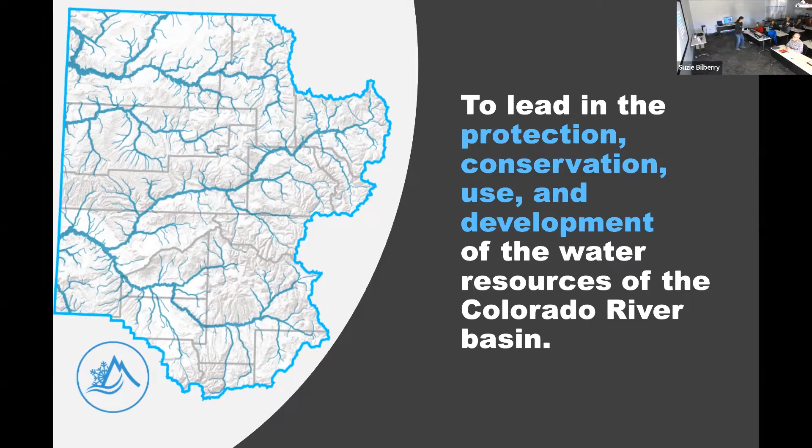And so... maybe I should take this with me. Just wanted to show this map.

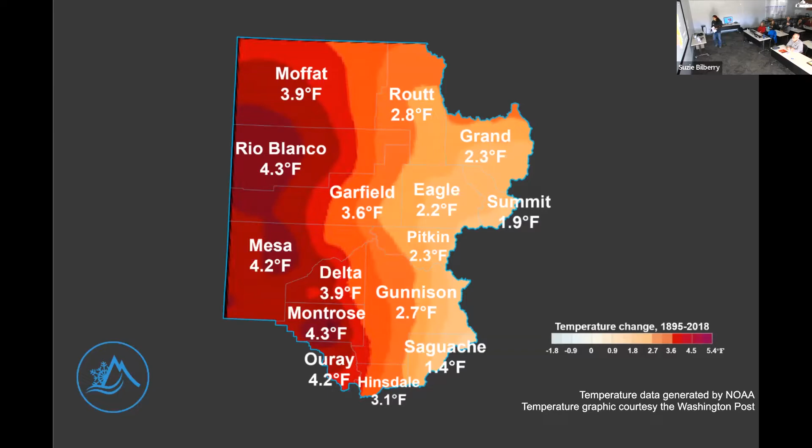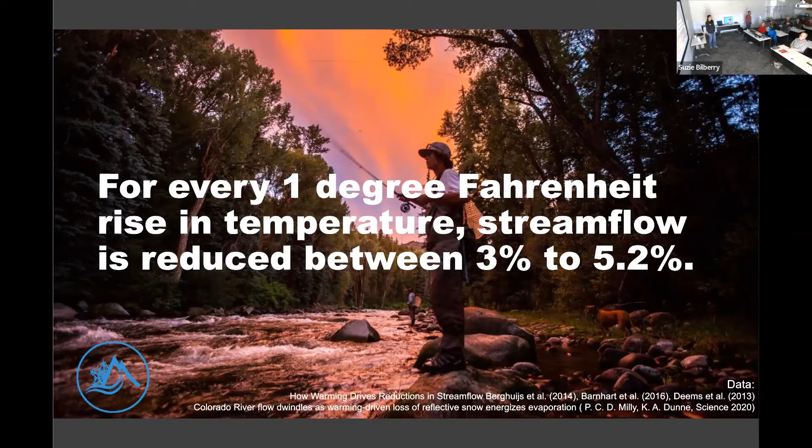I would like to introduce and thank Susie Bilberry with the Delta Conservation District. She has really been amazing to work with in organizing this workshop. So thank you, Susie.

We do have several presentations today, as you can see, and we really hope that you enjoy it. To get us started, I would like to invite Paul Maudlin. He will present or introduce our first speaker.

So I'm Paul Maudlin, and I'm from the Delta Conservation District, and there's a few other supervisors here, I think. Dave Whittlesby, Dave, raise your hand, and Paul K. Meyer, everybody knows him. And Stephen, you'll have to supply your last name too. Morris. Morris, that's right. Okay. Anybody else? Okay, all right.

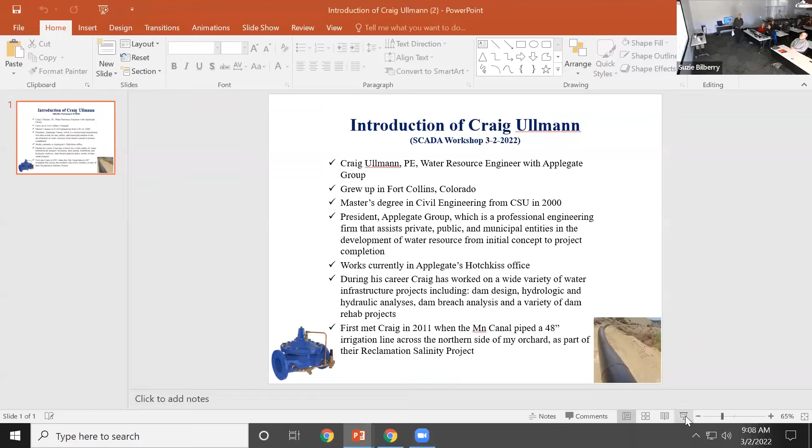So here's a slide. I'm pleased to introduce Craig Ullmann today. Sorry, one second, let me just share the screen here so people who are virtual can also see it. There you go. So do they know my name on the other end?

No, no, you can repeat it, please. So Susie, I think you're supposed to be talking right now. Oh, yeah.

So Craig is a professional engineer. He's a so-called water resource engineer with the Applegate Group. He grew up in Fort Collins, Colorado, went to high school, went to college. He's got a master's degree in civil engineering from CSU in 2000. He's currently president of the Applegate Group, with several locations - Hotchkiss, Glenwood Springs, and on the Front Range in Denver somewhere. Applegate is a professional engineering firm that assists private, public, municipal entities in development of water resources from initial concept to project completion.

Craig actually works and lives in Hotchkiss, so he's close by. During his career, Craig has worked on a wide variety of water infrastructure projects, including dam design, hydrologic and hydraulic analyses, dam breach analysis, and a variety of dam rehab projects.

I first met Craig in like 2010 or 2011, associated with the Minnesota Canal when they were piping their open ditch as part of their salinity projects. When they were doing the piping across the northern side of my orchard, I met Craig a couple of times, and I think I met the other local engineer that was kind of on site.

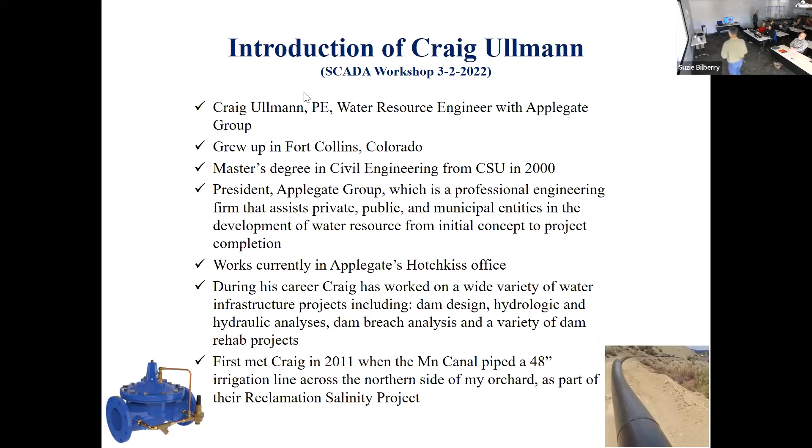So a couple disclaimers too, as I'm an engineer, it means I'm probably not the best about talking to groups of people, but I'll do what I can. Also, as Paul mentioned, Applegate Group, we're an engineering design firm.

We are not a SCADA implementation firm. We've helped some of our clients through a lot of our ditch and reservoir projects identify areas where SCADA could help them improve their systems, and then usually we'll hand them off to someone else who can help them with the nuts and bolts of exactly which equipment to put in, who's going to maintain it, and all those things. So I'm supposed to just give a brief overview. Some of you in the room may already know a lot of the stuff I'm talking about, but I'll give a brief overview of what it is, what it can do for systems, and what it's done for some of the systems around here. There's going to be some guys talking later about specifics on projects they've done, but I guess here goes.

So what SCADA is - it's an acronym, and there's about 20 different acronyms if you really dig into SCADA, but SCADA itself stands for Supervisory Control and Data Acquisition. There are several components to a true SCADA system. Some of the things I'm going to talk about probably wouldn't classify as a true SCADA system, but I'll go over that later. Usually it's a system where you're taking technology and using it to monitor systems, acquire data from systems, and control them, usually from a remote location.

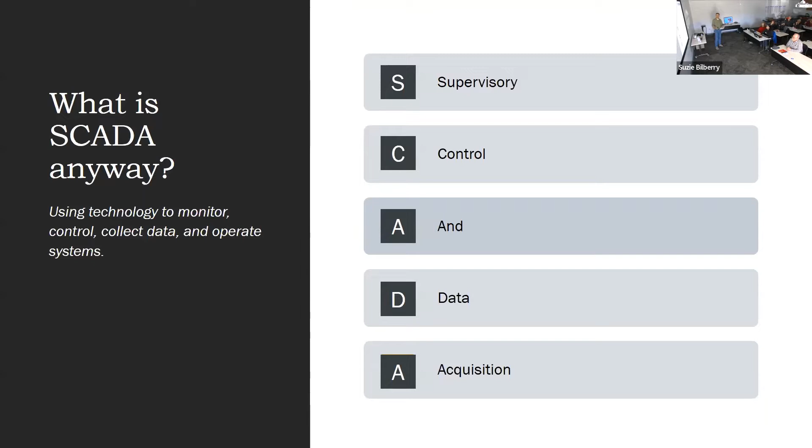On your canal side, it can do the same thing. You're diverting off of a creek - a lot of the creeks around here, as you guys know, have a big diurnal swing. They're high one time during the day and they crash during another time. You get a cold snap and the creek crashes again, and you're constantly trying to go up to a head gate to maintain the proper flow in your ditch. SCADA can help address that kind of thing with the canal.

Other canals, like you get down into the Grand Junction area, some of the big canals down there, they don't necessarily need to run at the same flow rate all the time based on demand, but they need a certain level in the canal to service all their lateral turnouts. So it becomes challenging for them to maintain their canal levels at variable flow rates. SCADA has been implemented in some instances down there with check structures to maintain canal levels at a static level despite changes in the flow rate in the canal, and that provides a good level of service to all of their turnouts in the system.

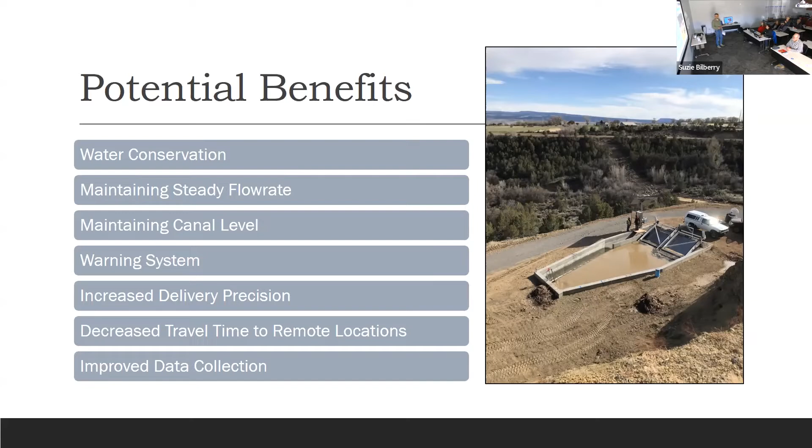A little history of SCADA. We obviously a long time ago identified the need - we used to have just a lot of people to run these more complex systems. And as population has increased, systems have expanded, the complexity has increased.

Electric power generation and transmission - you're talking about a nationwide grid now. To monitor that, there's a benefit to having a central control station that can see what's going on at one time.

Manufacturing doesn't apply to you guys, but it's another place that SCADA is commonly used. As a side note, my wife runs an herbal tea company up in Hotchkiss on our property. We have a little machine that packages the tea, and there's all sorts of little sensors and a computer in there that's watching the sensors, and it tells us if there's something wrong, or if we're out of some materials.

So there's all these different little things happening that are being monitored. It's almost like a little SCADA system in that one machine. And that's pretty common with manufacturing. Go to bigger automobile manufacturing plants, and they have SCADA all over the place monitoring the systems as the cars go through. But transit systems is another example. CDOT essentially has a SCADA system with a lot of their information on road conditions and cameras.

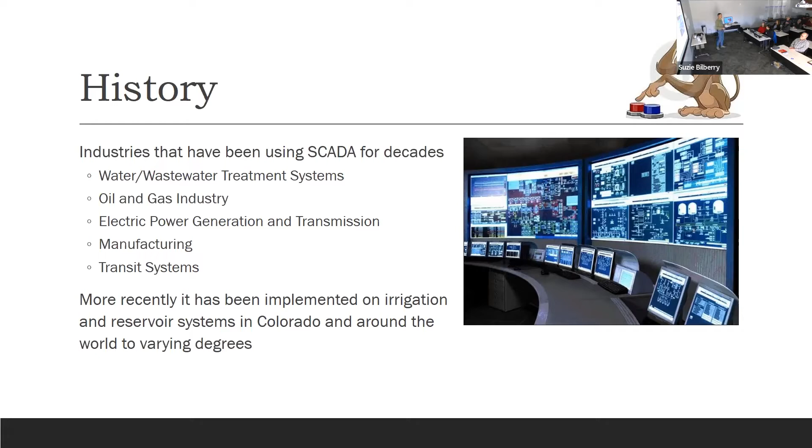More recently, it has started to trickle down to irrigation systems. In the past, irrigation systems were pretty much open ditches. Guys went out, changed the gates, and that's how it was. But more and more people are recognizing how some of this technology could be used on irrigation systems and reservoir systems to improve operations.

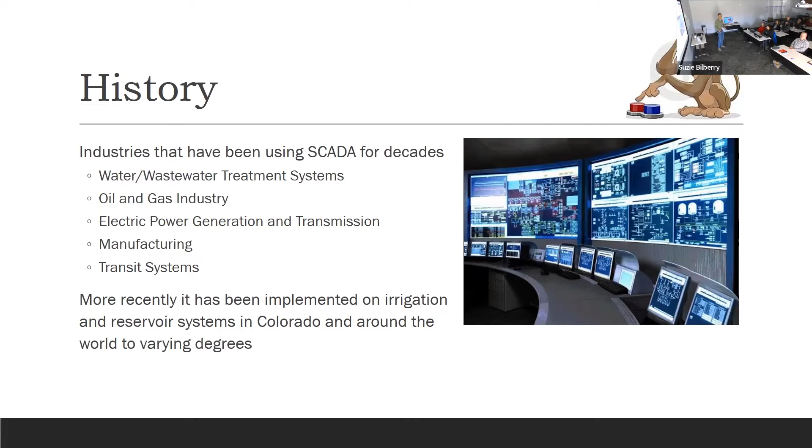I kind of broke this out into different levels of what I would call SCADA, but some of these probably wouldn't classify as a true SCADA system. I'm just trying to think it through and present it in a logical manner. The lowest step is just local monitoring.

This is where maybe you install a recording device on your head gate flume. That would probably be the most common one. Typically, head gate flumes are read by the water commissioner and recorded in the state system, however often they visit the site, and that's the data. Some sites we have just implemented a data logger and a level recorder that monitors it, checks it every 15 minutes, and records it to a data card. That's a very basic level, but it does start to get you more data on your system and what's happening.

Local monitoring and control is the next step, where you have a single site and you're going to install some monitoring and control devices. I'm going to go through all these in a little more detail.

Another step up would be remote monitoring. Now you're able to access the site - you've basically cast the signal up to some form of communication, and you're able to access it via cell phone or computer somewhere. But the next step after that is now you're not only monitoring it remotely, but you're controlling it. So now you can send signals back to the device and make adjustments to your system.

And then a final step, which really isn't too common around here with the ditch and reservoir companies, is automated monitoring and control. I'll talk about that a little bit.

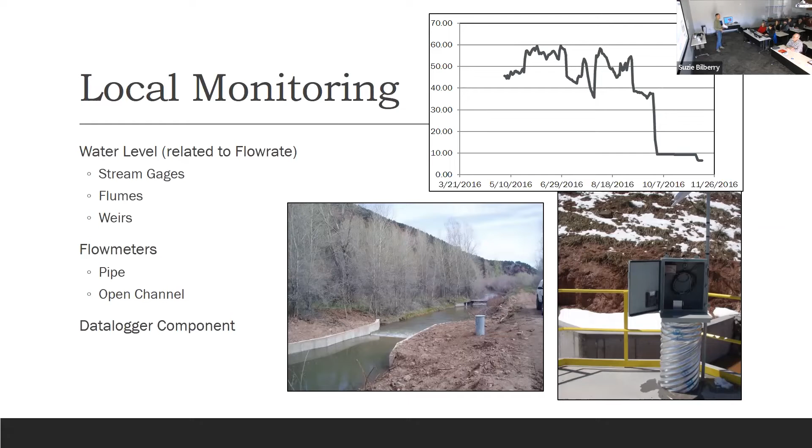The next step, as I mentioned, is when you start adding, in addition to local monitoring, some sort of control at the site. This is still all contained at the site, no remote communication with anything. This is an example of a structure we did, the Needle Rock ditch.

Up on the Smith Fork of the Gunnison, this was partially in conjunction with the ditch company through some funding with the RCPP project. This is the stream, here's their head gate, and we've got a control box here. The signal from our measuring flume below this structure comes into here. There's basically a computer watching that, and you set the flow rate. We want 30 CFS, that's what we're in priority for.

The gate will then open and close to maintain the flow rate, because the Smith Fork, especially in this spot, is extremely volatile. It varies. It can double in flow overnight very quickly. It can also crash overnight if it gets cold, because there's no reservoir storage or diversions above them. So they're pretty much a natural run stream right there.

The kind of downside to this is staff does have to visit the site to make changes. They can't change this site remotely. Someone has to physically go up there and type in the new flow rate.

So a typical site would consist of a sensor or multiple sensors. This site, we did add some level sensors in there to also be tracking the river level and the level below this, which is a stilling pool here. We track the level of that just to see if there's anything going on, because there's a screen in between the flume and this point. So if the level hasn't changed, but the flume suddenly sees a decrease in flow, we know the screen is plugging, and so that gets tracked.

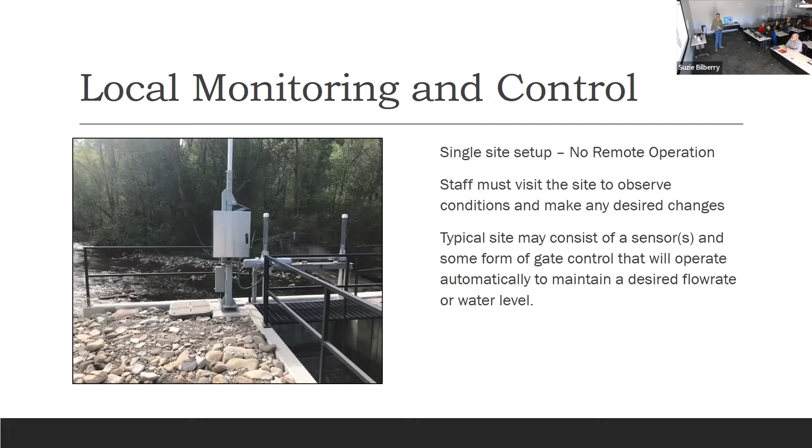Ultimately, this is supposed to get put into a remote system so that it could send an alarm, but they're not there yet.

So some other common uses, obviously flow rates. You guys have used the stream gauge network throughout the state, you can go in and check stream flows all over the state, and there's some canals also within that system. Canals, diversions, reservoir inlets, outlet flumes.

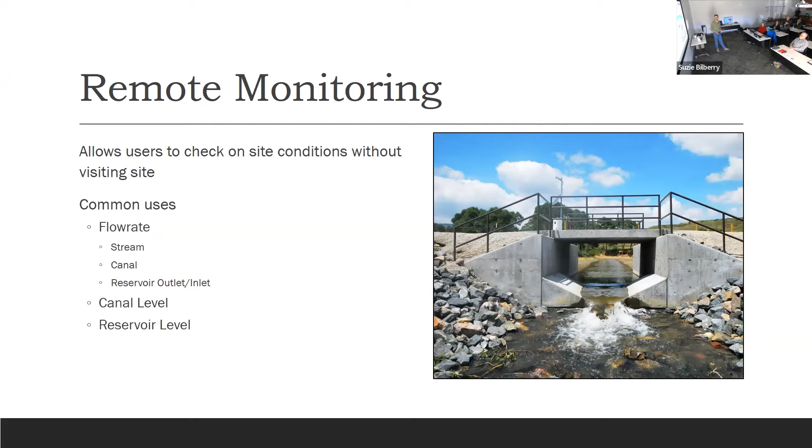Sometimes you want to track your canal levels, you want to know the elevation of the canal, maybe more critical to you at a certain point. Reservoir levels, like how much storage do you have left, tracking that. So those are all benefits of just doing basic monitoring.

Next step is you're doing that remote monitoring, but you want to be able to make changes to the system based on what you see. So now you're adding usually some form of a gate actuator to either an existing gate, or installing new gates with actuators built in.

Sometimes these are single sites, sometimes multiple sites. Common uses would be stream diversion gates, reservoir outlets, trash screens, or major bifurcations, like some of the canals in Junction have a split where it splits 50-50 or 60-40. Monitoring some of these key points within the system and controlling them can really save a lot of time if you're out there frequently, multiple times a day, trying to make adjustments.

The picture there was a structure we did. I tried to find a better one, but this is the best one I could find that shows the box. This was a device, which I'll mention later, made by a company called Rubicon, and it's a flow meter and a gate all in one.

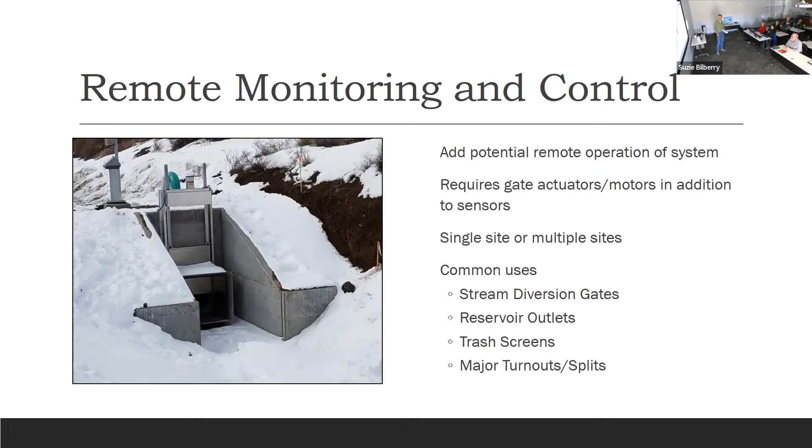That was put on their head gate diversion to monitor their stream diversions. Then you go to the highest level of what SCADA might look like, where you have an automated control and monitoring system.

This really isn't used, as far as my knowledge, within much of the US. They're kind of going towards it, probably out in California, maybe the Pacific Northwest, where there are some very large irrigation systems that are really trying to hone in on their efficiencies.

This picture is one I borrowed from Rubicon Systems. They're a gate manufacturer in Australia that was born out of 2007 through 2010 or so. They had a very extreme drought. Stream flows were half what they were. Kind of sounds familiar, right? Where we're unfortunately at right now.

But the government, for these very large systems, came in, and Rubicon was born out of this. They put 20,000 of these gates in throughout the system. They gated everything, went from wooden checkboards to all these gates.

The gates talk to each other. They know if the farmer can go online, he orders 5 CFS of water, wants it there at 6 a.m. All the gates communicate up clear to the river diversion. The system has learned through past experience how long it takes that water to get there, and what gates need to open and close at what times.

You can imagine the extensive amount of infrastructure required and the investment the Australians put into that system. But it increased their efficiency pretty substantially, and that's their breadbasket area.

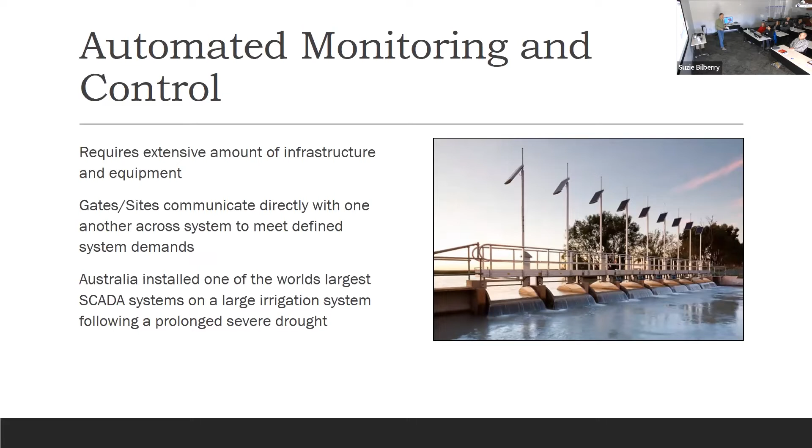So some of the components, just touching this at a high level: usually you have some form of sensors, and I'll go into different sensors later. But some other terminology you've probably heard is RTU, remote telemetry unit, or remote terminal unit.

These are basically, if you have a site with multiple sensors that you're going to cast to the satellite or some form of communication, you'll have an RTU. The sensors will feed the data into the RTU, which will then transmit the data to another location.

A lot of times, instead of an RTU, because RTUs and PLCs, programmable logic controllers, kind of have overlapping tasks, but PLCs are a little more flexible. They're used a lot in local control, like that Needle Rock head gate I showed you. There's a PLC there because it needs to be custom programmed to make decisions on how to open and close the gate, so that requires a PLC on site.

If you're going to be making the decisions elsewhere, then you maybe don't need a PLC right at the site itself. HMI is another common acronym - it's a human machine interface.

Basically it's a screen. Anymore they're going to mostly be touch screens because they're very easy to access and navigate. But it can be anything from just a little touch screen at the site, like we have at that Needle Rock, to maybe if you're casting everything back to a home base.

You have a computer screen that you can access everything through. One of the earlier photos I showed was a room, basically for, let's say, a large municipality like the city of Los Angeles and their water system. They'll have a whole room full of screens just monitoring their whole system.

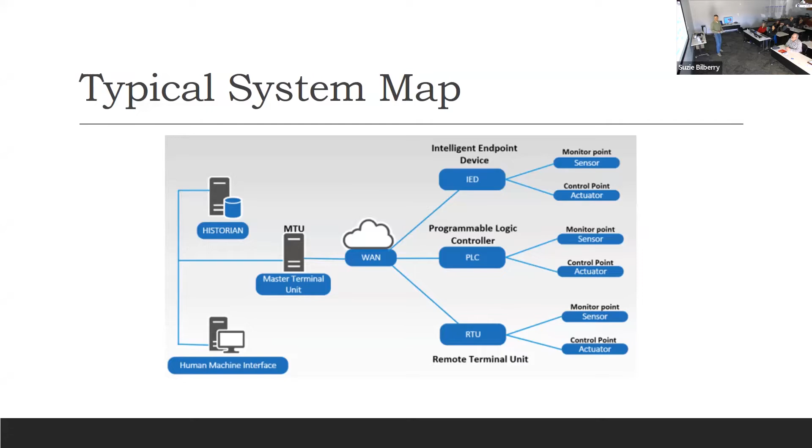Getting into sensors just a little bit, the most common one is some sort of water level sensor, because if we know water level we can relate that usually with the flume to flow rate. Also sometimes you're just interested in the water level because it may relate to whether you are spilling or not.

So there's a lot of different kinds out there. There's floats - this is a Sutron device. These are very commonly used around the state because of their simplicity. Basically down below there'll be a float on one end of a cable and a counterweight on the other, and that rotates this shaft, which has an encoder built in that knows how the water level is changing. Those usually have a data logger built into them, so you can plug a card in at the end of your season and it automatically downloads the year's worth of data.

There's pressure transducers, which I'm labeling as contact type - these have something actually touching the water. This is a pressure transducer, and I see someone brought some up here too, so these are actually immersed in the water. Another one frequently used on reservoirs is a bubbler system, which is basically spitting out bubbles and measuring the pressure required to discharge a bubble from the end of a tube. By knowing how much pressure it took to discharge the bubble, it knows basically what the pressure is sitting on the end of the tube.

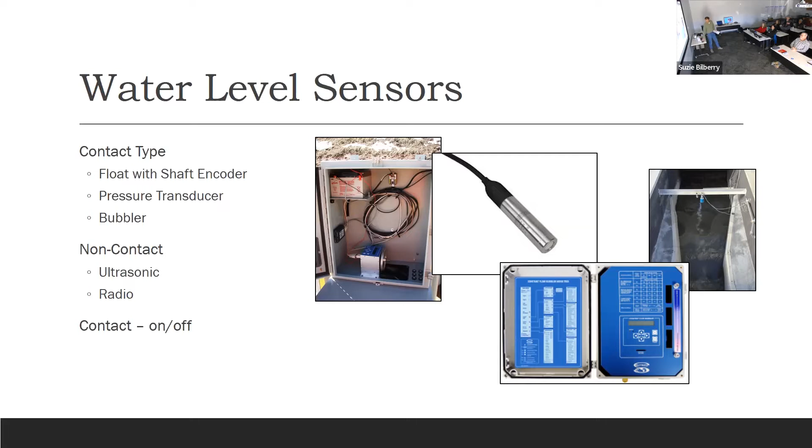And then a third type, I guess I doubled up contact, but there are some older ones that are just contact sensors - they know if they're wet or not, that's it. They have been used before as a high-low setup. If you're trying to maintain a canal level within a certain range, you could set one sensor low, one sensor high, and it knows you're above the set point or below the set point, but it doesn't tell you the actual level. So those are probably used less and less as these other options become more available.

Getting into flow meters, velocity meters.

There's a lot of different flow meters out there in the last 10 years. There's mechanical meters, which were more common a long time ago, just the old propeller style meters. These were used a lot out in the Pacific Northwest - their whole systems were using propeller meters to meter all the farmer turnouts, but they've slowly been converting to other options.

This is an electromagnetic meter made by Seametrics. This is an ultrasonic meter made by Metafim. They've been converting to those because of the maintenance on the propeller meters - the bearings wear out eventually, usually replacing bearings depending on how dirty your water is, possibly every 2 to 3 years. That gets to be a problem if you have 1,000 of those across your system. So a lot of people are going to more of these. These also have data loggers that you can get as an option, and some even have them built in.

Other options - this is an acoustic Doppler meter that can be mounted either inside a pipe, in a rectangular channel, or even in an open channel if it's fairly prismatic, but it's basically tracking the velocity. It develops an average velocity for your cross section, and it needs an area relation curve, because this little sensor is measuring the water depth. So it says, I'm this deep, which means based on my curve I have this much flow area multiplied by my average velocity, and it spits out a discharge.

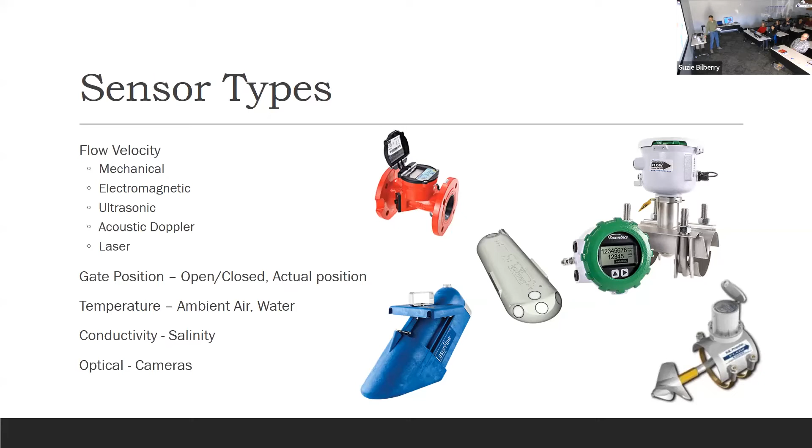Integrated gates - there's several companies out there now selling these, and this is not a concise list. I actually realized I forgot one that I'll mention here, but Watch Technologies, if you go to any conferences, they usually tend to be there. They basically make their own custom slide gates and they'll attach actuators to them. They also sell smart gates.

They'll add level sensors so that you can basically program, and the gate can be kind of a standalone unit that you can then program if you want to maintain upstream level, downstream level, or a flow rate through the gate. They can provide that type of device. They can also provide actuators and equipment to automate existing gates. If you have a slide gate on your system and you want to basically have the actuator on there, Watch Technologies is a group that's worked with folks on that.

Rubicon Water is another one that we've worked with on various projects. This was done quite a few years ago on the Front Range, but it was a pretty unique project. Rubicon sells various gates now - at this point they have some overflow gates, some sluice gates, but they're the guys out of Australia that came out of their drought. Their gates are touted as being very accurate for flow measuring and controlling.

So it's one - you put the gate in and the gate's measuring the flow. You don't need a supplemental flume. It monitors upstream level, downstream level, and the gate position, and by doing that it's able to calculate the flow. But you can use it to control a variety of things and you can program it.

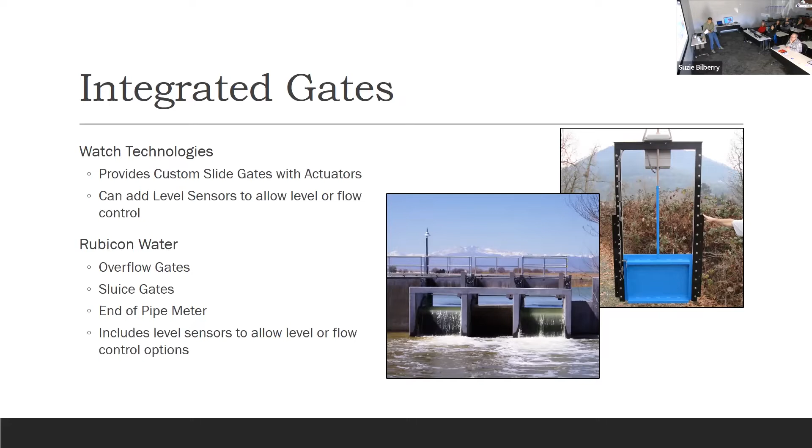Additional considerations that you definitely want - if you're considering a SCADA system and you start talking to either an engineer or a SCADA installer, there's a lot more to it. You've got to really look at the appropriate level of SCADA. It can be easy to get carried away and start looking and say, oh, we'll automate all these sites.

But usually for the canal systems around here, the Australian model just, I don't think is really all that applicable, and I don't see it happening on a lot of the systems around here. A lot of our ditch systems are very small. Water rights get extremely complicated on the smaller ditches because you're going in and out of priority all the time.

To try to automate such small systems would be very expensive and challenging without a lot of benefit. But that doesn't mean there's not an appropriate level that would provide a significant amount of benefit for those systems. Power availability—usually these things are just done with solar.

Trash screens, however, are one thing that if you're going to incorporate a trash screen, you really need to consider. The one we did with Fire Mountain is one of the few solar powered trash screens I know of. Most of the time, if you're putting trash screens and automated gates in, you're probably going to be bringing power in, unless you use something similar to what we did on Fire Mountain.

Communications—what are your options at the site? Cellular, radio, satellite. Satellite's becoming more and more common, I think, but cellular in Western Colorado can be tough. There are a lot of sites and canyons where you just can't get a cell signal. So then you're looking at almost a combination where maybe you bounce your signal out to a place where you do have cell service via line-of-sight radios.

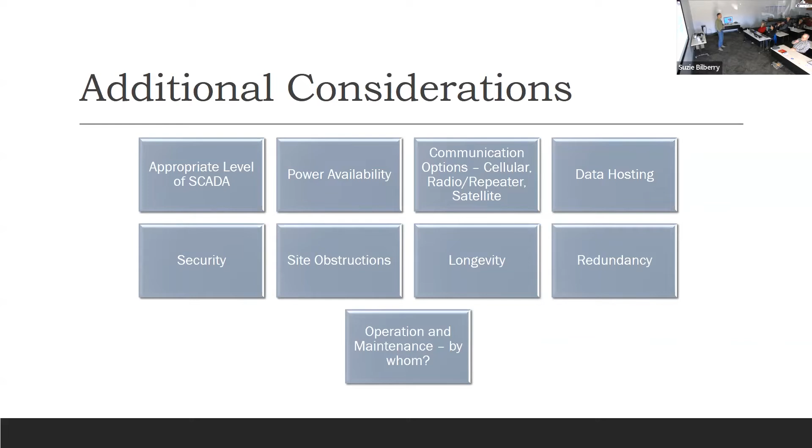It doesn't mean you can't use the product, but you want to ask the person selling the equipment: can I have someone else maintain this locally, or does it have to be your technician? There are some products where they won't let a third party work on it - it has to be their technicians. That's a problem when their technicians are a month out for a site visit, versus a local guy who knows how to program things but can't get the passwords to get into the machine. So these are all discussions to have when considering certain equipment.

Some of you may have heard of the Irrigation Training and Research Center out at Cal Poly. They have a very good website with a lot of research on irrigation and canals. They've got some papers - I don't have links here, but search for these, they're 3 pretty good, fairly recent papers. They've done a lot of work looking at various irrigation systems throughout California and the Pacific Northwest, and even came out and looked at Fire Mountain Canal around here.

They published some papers with very practical looks at SCADA systems on irrigation systems. They're also a good source if you're considering various flow meters - they've done a lot of testing. You can go to their website and see if they've tested the meter you're considering; they'll rate it for a certain percent error based on testing at their full lab in California. So those are some very good papers that dive into real world applications of SCADA and things to consider.

As for SCADA consultants, this is not a concise list by any means, but these are some people we've worked with that we pass people off to when they're ready - once we think we want to control this at this site and that site and bring it here, we say okay, now it's time to get one of these guys involved.

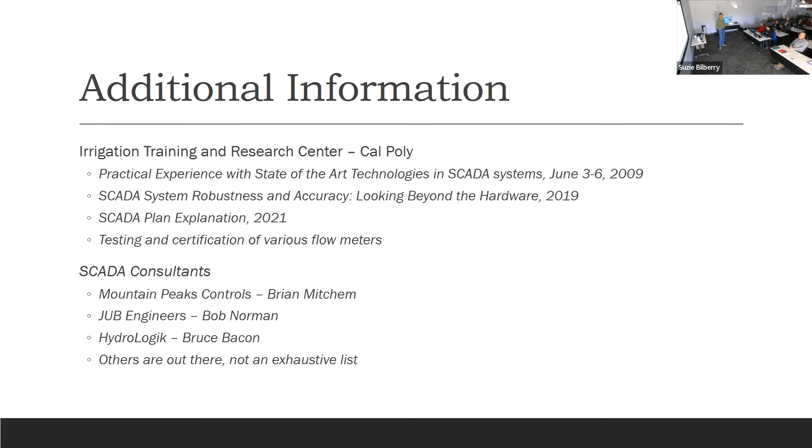HydroLogik - Bruce Bacon is a guy we've done a lot of work with over on the East Slope. He's working with a lot of ditch and reservoir companies over there implementing SCADA systems for those guys. And then obviously there are others out there too.

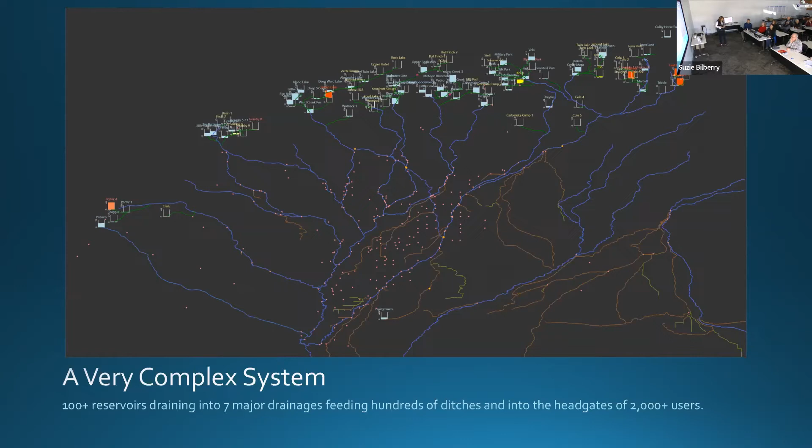We have a very finite resource. In the not-so-distant past, we used pencil and paper ledgers to keep track of ownership and water orders. But this was when the list of our owners could fit on one sheet of paper—that's not the case anymore. We also had hand-drawn maps illustrating the drainages, typed sheets making up the decree call lists, and all of the computations were done by hand.

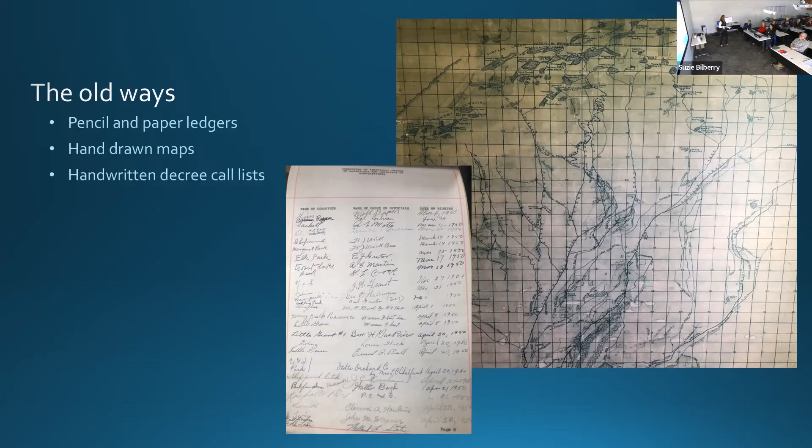And do you think mistakes happened? Yeah, absolutely, probably more than we want to recognize, right? So I still love and use the old maps, I do, for illustration purposes. But thankfully, for the past 20 years we've had an Access computer program which tracks the ownership information and also the debits and credits associated with their water account. But its functionality is waning and fraying around the edges, and I'm not sure which day it's going to crash on me and I'll be back to the pencil and paper method.

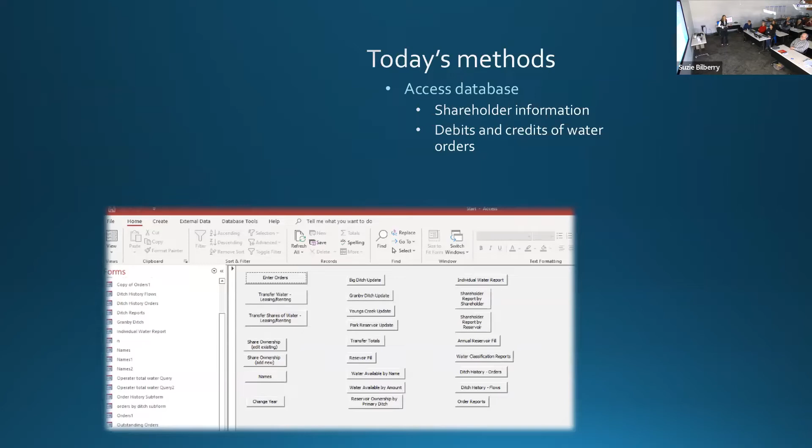So we're looking forward to the future with our efficiency project. As Bob mentioned, it's a 2-phase, 4-year project using drones to collect accurate capacity charts, then installing sensors to collect real-time data of gauge heights and stream flow rates. And finally, custom software that integrates and models all of this with an interactive water ordering system, and hopefully with an app, right? Because everything's on an app.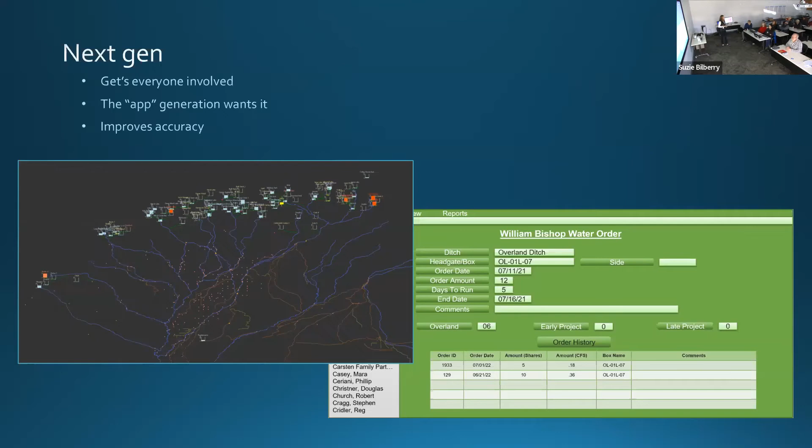In my opinion, an online ordering system can get everybody involved, and it also has the potential to put the responsibility back on the users and make them part of using their water efficiently.

Let's talk about the benefits. Our irrigation season ends October 31st, and I need the gauge rod readings as of that date to know the carryover, which is the amount of water remaining in the reservoirs at the end of the season. If we get numbers too early and there's a heavy rain, the owners might not get proper credit. If we get numbers too late, a senior filling decree might be injured.

Right now we're in our fill season, November 1 through March 31st, and we need sensors to monitor what's coming into the reservoirs. If it's a good water year, the reservoirs spill - there's sufficient water and everybody's happy. But that hasn't really been the case the past few years. Inevitably, there's a call placed by a senior water right owner, and that triggers a peg on our reservoirs. All of our decrees junior to that senior calling structure have to stop filling until that senior is satisfied.

We also have our irrigation season, which runs April 1st through October 31st. During that time we want to constantly monitor our reservoirs. We have a very large concentration of high hazard dams on the Mesa, and we want to know where our water is, when, how much, all the time.

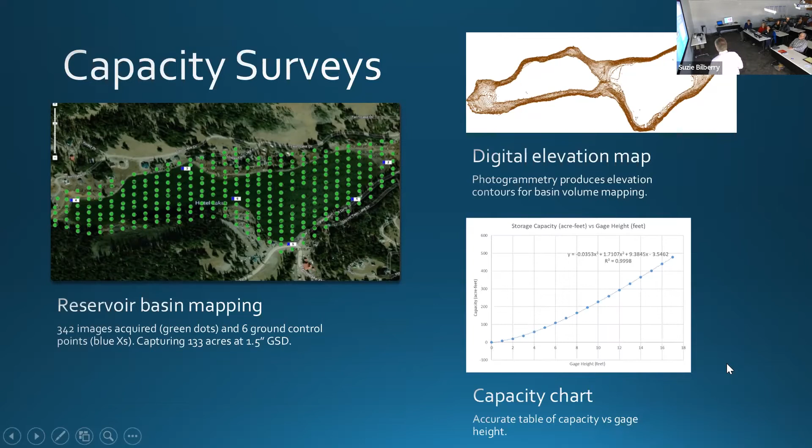So we use that model in another device that we provide, another technology called Aquabits. But before I go to that...

People are interested in cost. If you had us do a reservoir survey, we would charge you somewhere between $500 and $2,500, dependent on the reservoir size. The larger the reservoir, the more dollars. It also depends on the number of survey control points, the precision ground control targets we have to survey, and how easy it is to access the reservoir and get around to set the targets. That's what controls the cost.

If you want to do this yourself with your own drone, here are some software tools we provide or can provide. The photogrammetry software is called Remote Expert. We produce that, we've written that software. It's available at dronemapper.com. For GIS, contours, and volume generation, we use Global Mapper. It's licensed for about $500 or $600, and you get that from Blue Marble Geographics. Excellent piece of software, very affordable and accurate.

Next chart, okay, so this is Aquabits. This is an embodiment of the hardware, the next generation. It has an electronics enclosure, a NEMA enclosure for weatherproofing, a lithium iron phosphate battery, a 10-watt solar panel, and a couple of different versions of pressure transducer that we use.

So how this works is we serve two applications, a flowing water application in a flume or weir, or a still water application in a reservoir. Each is equipped with a sensor. In this case, it's shown slanted near or at the invert of the reservoir, so we can calibrate the zero elevation reference. Likewise, with the flume, the sensor sits right on the floor of the flume, and that's our zero point. We measure gauge height in both applications by sending a digital signal to a microcomputer or PLC.

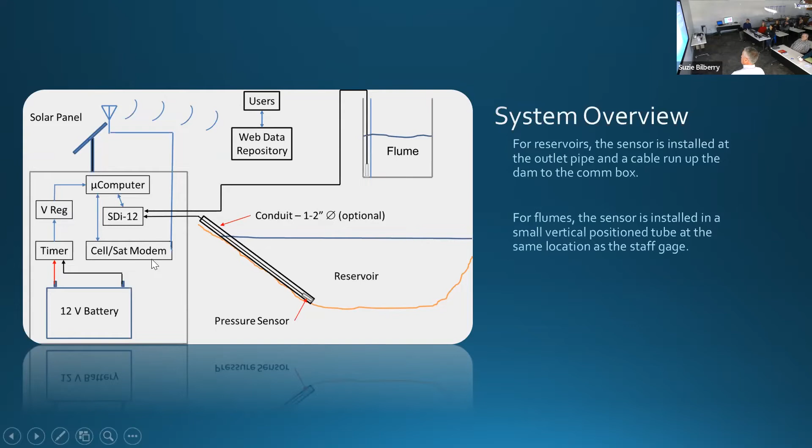This electronics setup includes the solar panel, the battery, the microcomputer, the immersible sensors, as well as your selection of either a cellular or a satellite communication modem. We'll go into that, or I'll show you, we can talk about that later.

Okay, so here's example data that we've been taking since last summer. Here we show a time record for Hotel Twin Lake from July through January, mid-January I think. The data is provided at 6-hour intervals via SATCOM because there is no cellular communications at that location. What's interesting about this reservoir is that with no precipitation, which occurs through a lot of this time frame, there's a natural ingress. So this is being fed by springs, internal springs. You can see that even in the winter, after the ground freezes, you still have the same natural ingress, plus or minus around 0.2 of an inch per day, and it changes just a little bit.

A couple other interesting features. This is in December, these are snow events. Remember the snows we got mid to late December? I'll show you some blown up data on this, it's very interesting. We didn't go out to February, but I have data on that as well. So that's Hotel Twin Lake.

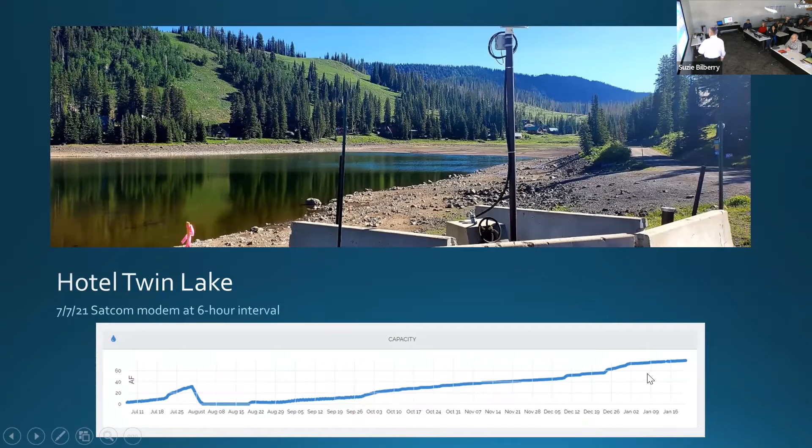This is Park Reservoir, a larger reservoir with a much longer time frame. You can see data from October or late September when we did the install out through mid-January or so. Yeah, it's a live sensor, we're collecting data now, again 6-hour interval data, also transmitting with a satellite communications modem. It also has a natural ingress. Hotel Twin was about 0.2 of an inch per day, and this is about 0.4, so about double the amount of water, but it's a much larger reservoir.

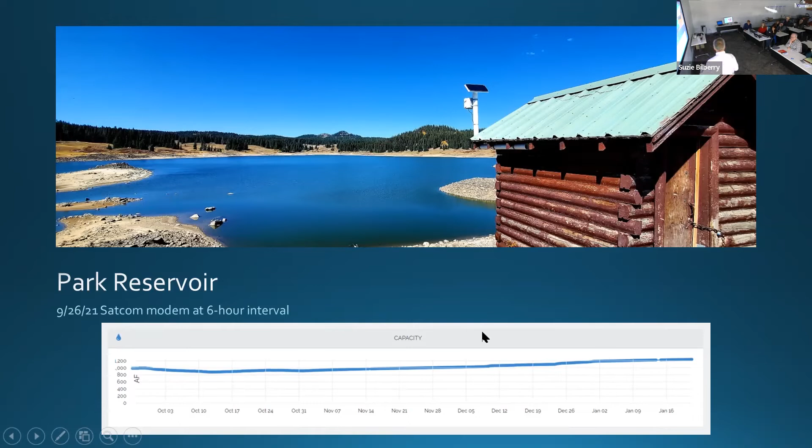Okay, here's some examples of open channels that we've outfitted with instrumentation. This was our first one, Big Ditch at Cement. It reports at 2-hour intervals, and it's fortunate that it has a cellular signal modem, so the data costs are a little bit more affordable. These two went in the summer of last year. Harts Basin Pipeline, that's a 9-foot suppressed weir.

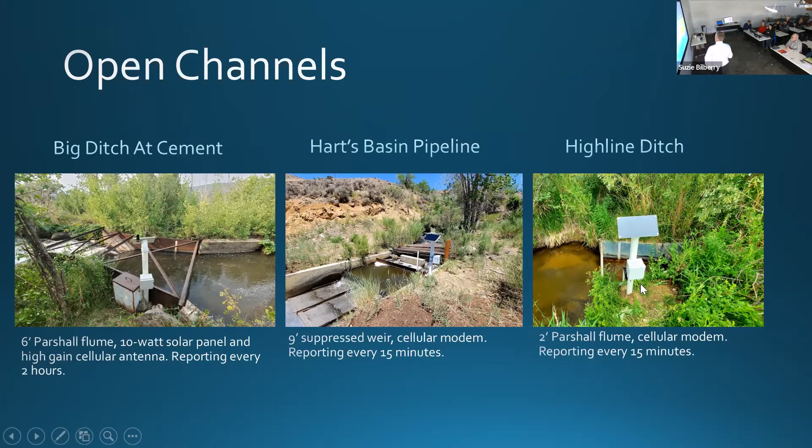The instrument's shown here, and there's a stilling pipe that we put the pressure transducer in. In this case, the pressure transducer does not sit on the floor because it's stagnant still, it sits at the zero elevation of the weir blade. So we set that to calibrate it. And this is a 2-foot Parshall, it also reports via cellular every 15 minutes.

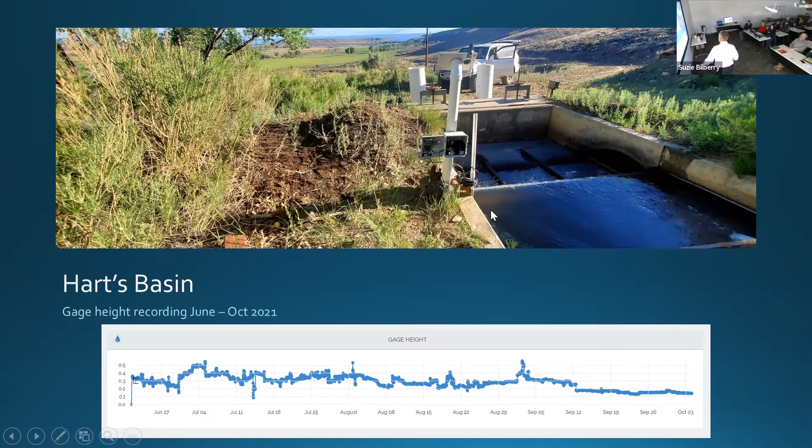Next slide, so here's the gauge height recording for Harts Basin. Looking down, here's the intakes. These two big 16-inch pipes are the intakes, 9-foot weir. Here's our stilling tube, if you will. The electronics box is open, and the pressure transducer sits on this wall right next to the staff gauge for manual reading, and provides this data through that period at 15 minutes.

Is the cellular a line-of-sight type communication system? I think it would be, because it's 4G LTE, provided by AT&T, Verizon, or sometimes T-Mobile. So somehow they're getting signal in there—not sure how they're doing it. But we have a spectrum analyzer, so we can go up and do a scan to see what service providers are there before we select the modem for the instrument.

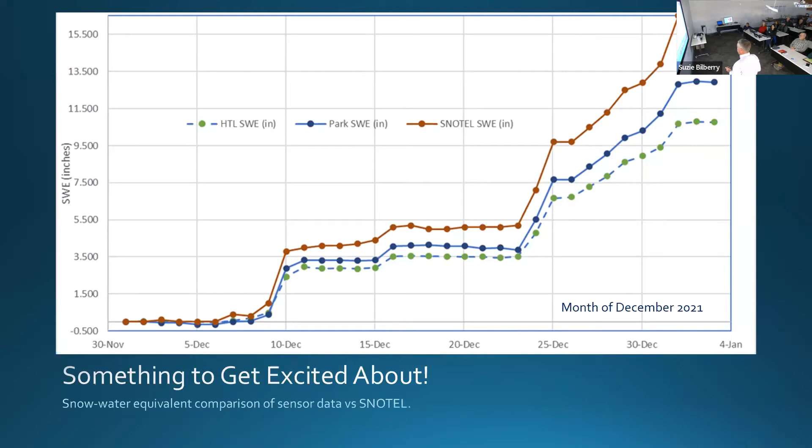How are you measuring snow water equivalent? I thought you were measuring pressure. If you have a water column and a hydrostatic pressure sensor, it senses how much water there is, how it grows. Right, but that's in the reservoir—correct, but these are reservoir sensors. You have it in there as snow water equivalent because it is: you have a water column, and there's a caveat—then you have an ice layer, then you have snow, no matter what the density. If the water column is in contact with the ice, you're measuring water, doesn't matter what the density is. It can be 9% less in the ice layer, 20% less in the snow layer—still water. So it's all weight. What we're doing is measuring weight.

Are your targets floating out of the reservoir? No, you mean for the drone? Yes. No, the reservoir must be empty so we can map the basin—we can't see through water when we fly it. So those targets are on bare ground after the reservoir has dumped its water. Then we correlate the image to the position of the targets, what pixel it occurs in, and that's how we provide very high accuracy on the maps—very low elevation error, sorry.

Okay, the last data slide that I have is from last week's event. Blue is Snotel—this is for just Park Reservoir, snow water equivalent.

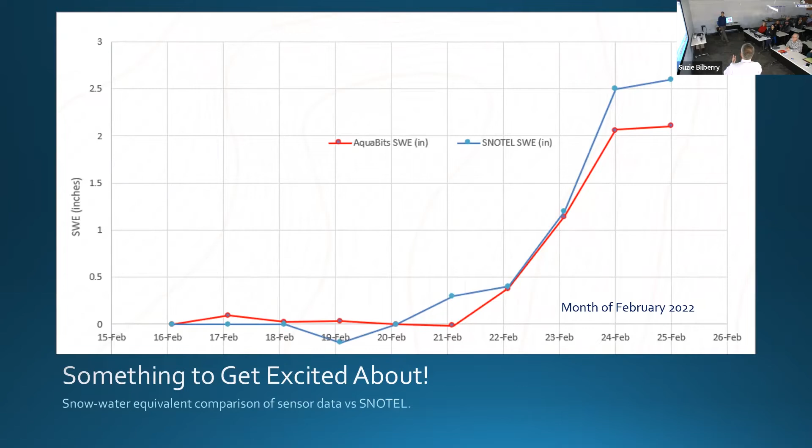My name is John Walker. I founded a company called Walker Water. Walker Water is a technology company focused on the development of software tools and tech and services for irrigation water management. We are a small company, so there was mention of not using startup companies, but I am a startup company, so please give me a chance.

All right, so what we're looking at here is just a cartoon of the global water cycle. There's a lot of complicated terms in there. A lot of effort is being made to model this water cycle. The USGS and the Division of Water Resources in the state of Colorado, if you go to their websites, they're putting a lot of effort into trying to model these systems.

Walker Water is not quite that ambitious. What we're going to try to model and get a better quantification of is evaporation in our reservoirs, inflows in our reservoirs, okay? If we put a sensor in the reservoir and we put a sensor in the outlet flume of the reservoir, we know the outflow, right? The commissioner went up there and turned, let's say, 10 feet of reservoir water and 2 feet of flow. So we have 12 CFS coming out of the outlet. Using that, we can calculate the exact level that should be changing in the reservoir.

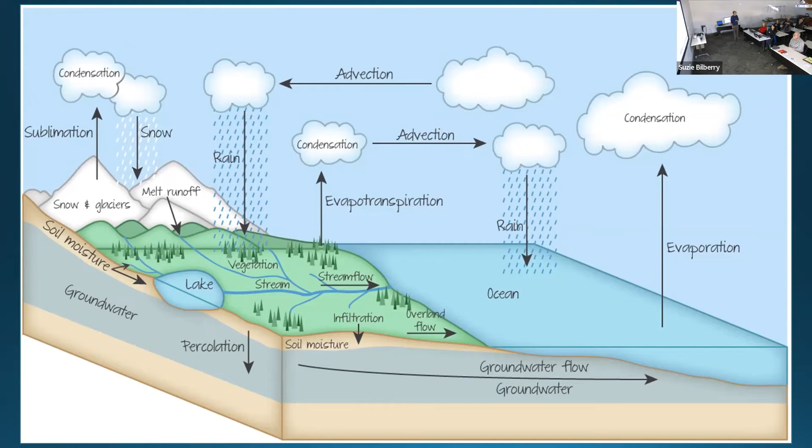And I think the commissioners have been using that water as pocket water for all these years, right? Keeping it in their back pocket in case something goes wrong. They'll have it available for them. Okay, so we're going to attempt to better quantify those types of events, precipitation events, evaporation events in the reservoir.

But there's also another set of events that occur. So we have long ditches that we deliver water down, and those ditches incur transit loss. There's shrink in those ditches, right? And as a user, I'm also on the board of directors of Grand Mesa, but how is shrink computed? Well, typically it's 1% per mile, all right?

Let me give you a couple of examples. On Surface Creek, when we turn a lot of water into the creek, on occasion, the creek loses something on the order of 10 CFS. It just goes into a hole. Now, we don't know why that is. Maybe it's because we're putting more water in, the banks are absorbing some of it until they get saturated. Maybe because we've raised the level, the trees are starting to drink it. I don't know.

We don't really know. But we do know that the creek will lose 10 CFS, and we don't know how to predict it or how long it's going to last. So we'd like to do a better job of quantifying that, trying to get an understanding of what's going on.

Let me give you another example. I get my private water delivered along a very long, dry ditch. In fact, Denise says it's the worst ditch in the valley, and she gave me crap for buying that piece of property when I bought it. But the problem is when the ditch rider assigns an 18% shrink at my head gate, I'm always like, why is that? That seems extraordinary, right? Particularly because I'm one of the first head gates on the ditch.

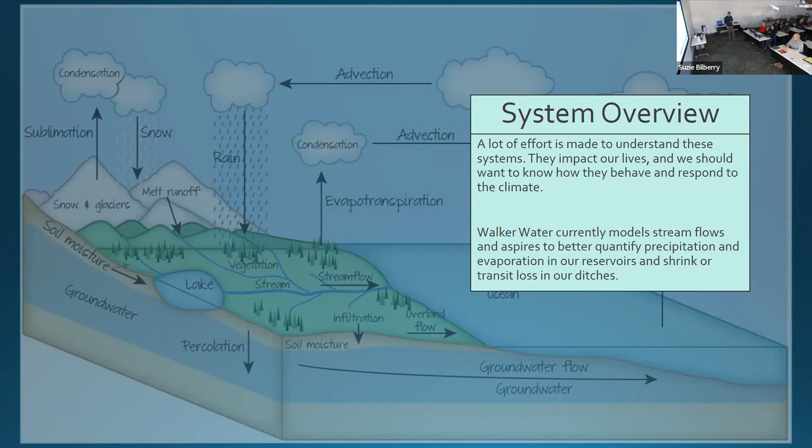All right, Denise mentioned aging methods. I am a water commissioner on the mountain, so I took these pictures last summer. On the left, you see how we measure gauge height. All of the reservoirs up there have a gauge rod that goes down the dam to the outlet pipe. Those gauge rods, some are metal, some are wood. The wood ones are supposed to float, but they've been up there for 100 years. They're completely saturated. They don't float, they just sit on the bottom.

Each of those gauge rods is graduated with a 1 foot graduation. Some are scratched on, some handwritten, some have metal bands on them. Some of the gauge rods are metal pipes that are actually broken, so how are you supposed to measure when the pipe's sitting up in the air like this? So you can see that measuring with a ruler is probably not very accurate, especially if there's any wind that day, which there's always wind on the Mesa.

You can't really get an accurate measure of the gauge height. The middle picture shows me measuring flow rate in a V-notch. One thing to notice immediately is I'm not doing that properly. Apparently you're supposed to put a stake about a yard upstream of the V-notch, at the same elevation, and measure there—kind of like a little stilling pond. But inevitably you can't find that stake, you've got to reach over there, you're going to fall in that cold water. So we just stick it right there, and then use an equation to convert decimal inches to a flow rate. But that's not very accurate.

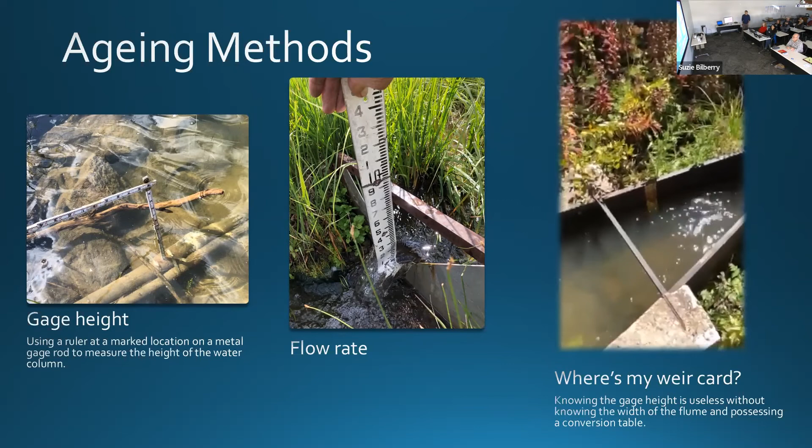Denise talked about old documents. These two documents here, the one on the left is the ditch priority. It's essentially the priority of the ditches on the surface creek and the amount of water assigned to them, the volume of water. So when a call comes on the creek, we use that document to determine what head gates need to get shut off.

The document on the right is a call list for a reservoir. There's a reservoir in our area called the Fruit Growers. It's the number 24 priority. And when a call comes on from Fruit Growers, we need to know what reservoirs above it to peg, as Denise had mentioned. So that's the call list. These are the two documents that are currently used to do this sort of thing.

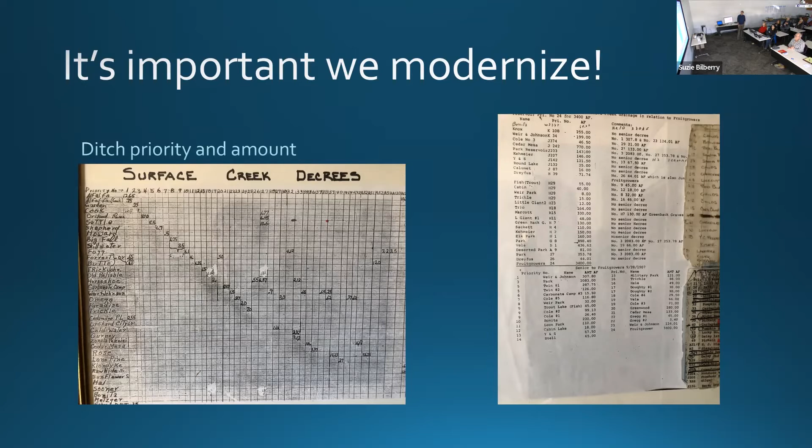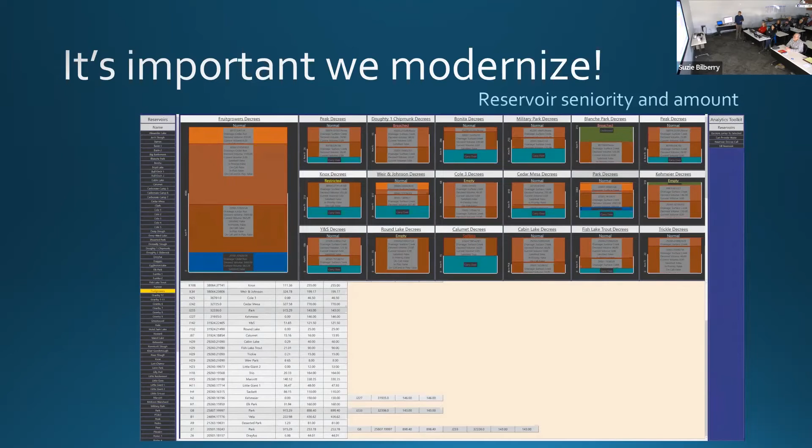Grand Mesa water users hired Walker Water to do a feasibility study of putting this stuff into a software system to make it accurate. Because you can imagine when a call comes on the creek, well, let's say a call comes on a reservoir, we have to go up and peg reservoirs, calculate volumes, bring that information back down the mountain, compute the volumes in each of the reservoirs that are going to be affected. And do you think mistakes can be made in that computation? You bet. All right, so let me just go through and talk about what we're looking at here.

So on the far left, and I have this software here on my workstation here, if anybody wants to see it live, I can demo it later. On the left are the list of the reservoirs. I've selected the Park Reservoir here. Essentially what comes up down here is a list of the reservoirs that are junior to the senior most decree. So I've selected the senior most decree.

What you're looking at here are tanks that represent each of the reservoirs. This is the tank for Park, it has 3,000 some odd acre feet in it. The cyan color is the carryover from the previous year. The blue is water that's coming into the reservoir on top of the carryover. The reason I have this now on Park is because we have a live sensor, right? So what you see in that dark blue is the water that's come in there since October 31st, and that is live data.

So this is saying how much water is coming in to satisfy the senior decree. These brown colors indicate there's no water. This is yellow because I clicked on it, but this is the amount of water that satisfies the number 1 decree, the senior decree in the Park Reservoir. This is a decree that is junior to the senior, and this is the third decree in Park. So Park Reservoir has 3 decrees, okay?

Now, when I clicked on the senior decree, it pulled up all the reservoirs that are junior to Park or junior to that specific decree. So Peak, Military Park, Blanche Park, Peak again, Elk Park, Bella, etc. Notice the carryover in each of those reservoirs. That carryover is protected, that water cannot be called out. That's why carryover is really important, right? And that's why it's important that we get those carryover numbers accurately in a timely fashion, because we can injure somebody if they're not computed properly.

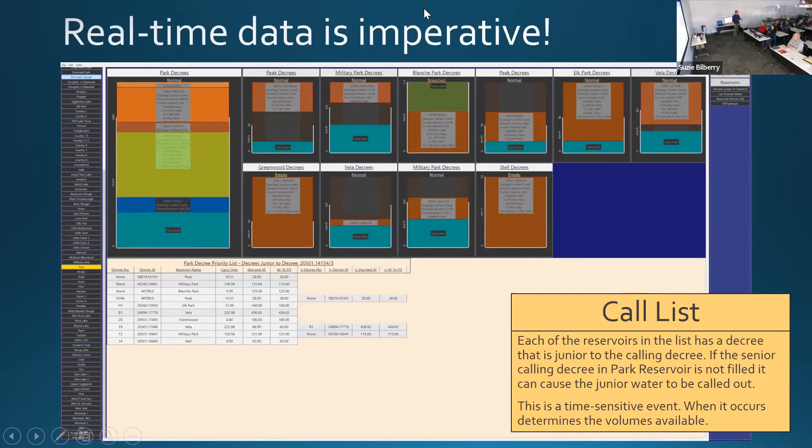Okay, so this is a really powerful tool. I mean, it saves us water, right? It saves us water because we are now delivering water to the appropriate calling structure, and we know exactly how much water is supposed to get there. In the past, it's always been a kind of, is it right? We don't really know. So this is a cool tool.

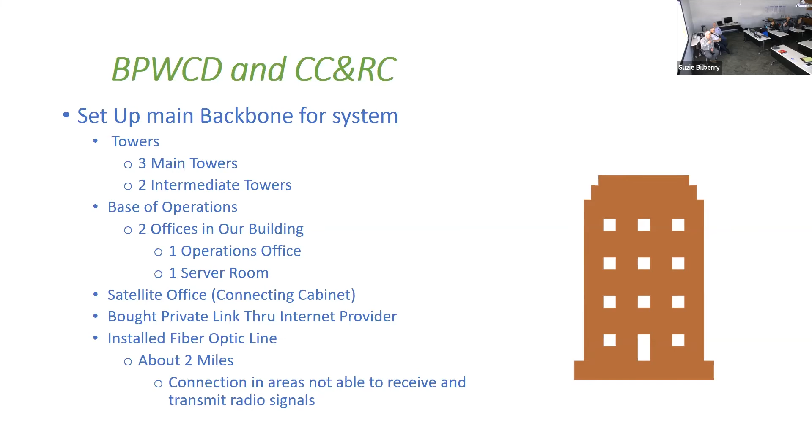Since we've put the system in, we put in a new ramp flume. It's got level sensors connected to the control gates in the river diversion head gate. This will maintain the level of the canal no matter what the flow of the river is. So whether we're pulling storage water or on overflow, our head gate will stay the same.

It'll divert the same amount of water all the time. We've automated the control gates and put in 5 cameras at the head gate. From the office or anywhere, via smartphone or computer, we can look at those 5 cameras and know what's going on.

If you want to check the accuracy, we've got a camera pointed directly at the staff gauge and the ramp flume, so you can get a visual monitor of what that's doing if you don't believe the reading you're getting.

We've also got a camera pointing down at the grizzly bars in front of the head gate, so the superintendent can look at that camera and know if something is plugged up on those grizzly bars, and if it is, what kind of equipment he needs to bring up there to remove it.

We've got 2 cameras at the main Silverjack Reservoir, and these are panning cameras. We can pan the entire reservoir to see what the level is, or if something's kind of goofy up there, we can rotate that camera around and point it right at the dam house.

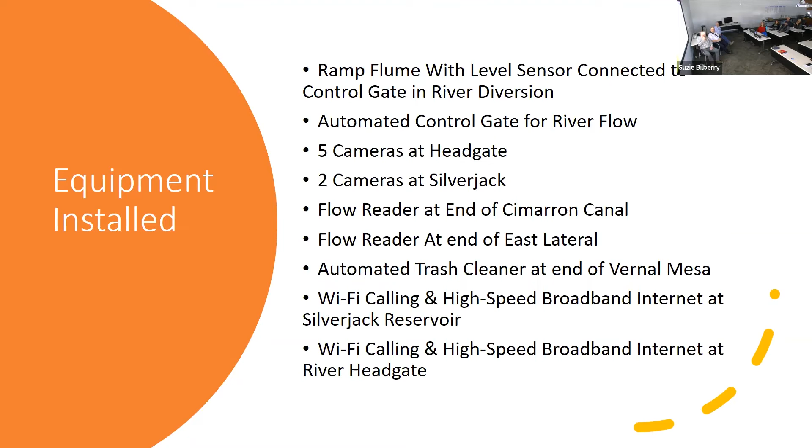Before I go into some of the pictures here, I should have thrown in a map of the Fire Mountain Canal and Reservoir Company. The reservoir is Paonia Reservoir, which is quite a ways upstream on the North Fork of the Gunnison River. The Fire Mountain Canal actually has water rights out of both the North Fork and LaRue Creek.

Leroux Creek is more down towards Hotchkiss, at the lower end of the canal, where just recently, over the last couple of years, we've piped that entire lower section from LaRue Creek to the tail end of the canal. The Paonia Reservoir head gate is probably close to 20-some miles upstream, and then the reservoir itself is probably another 10 to 15 miles above the head gate.

So the SCADA we put in, and it's an ongoing thing, is that we've had SCADA for a while up at the reservoir where we could remotely monitor and control the reservoir. That has been upgraded, and last year was kind of the first year we really got to use the upgrades. We've been in the process of replacing the high pressure gates in there, so that's been down for a couple of years while we were replacing them.

But we've got Wi-Fi up there now, well, I should say high-speed internet. We were able to get that up at the reservoir through Elevate, the DMEA. So we've actually got Wi-Fi calling availability up there and high-speed internet, which makes it nice, because again, it's kind of in a remote area. We did have a hard line prior that went up the telephone, so you had dial-up internet, and it got to where that's absolutely obsolete. I mean, we got to the point we were going back on Amazon and everything, looking for old laptops so we could actually use the dial-up with.

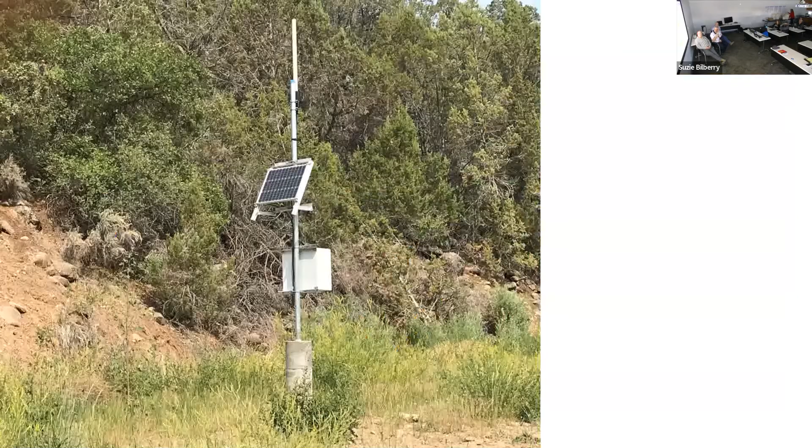We needed a repeater for the two of them to talk together. So this repeater actually picks up a signal from the LaRue Creek head gates, and it can talk to the main head gate on the trash racks, and also send signals into the office. We've got a complete computer setup to where we get everything from the reservoir, the LaRue Creek, the main head gate off the North Fork, all coming in together.

As for the water the last couple of years, this hasn't helped us a whole lot. LaRue Creek has been pretty stingy on its water, and we're down quite a ways on the water rights on it. So we haven't been able to do a lot.

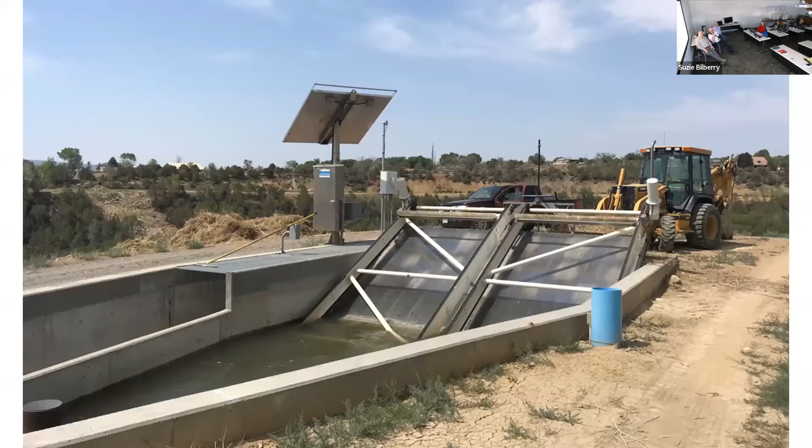Like I say, this system's all new. This is the head gate on the canal, or not the head gate, but the trash rack at the head of the pipeline. As you can see, the canyon goes in behind the backhoe there and then drops through the canyon and comes out on the other side. You can actually see on the far side there, the cut where they come in.

Get up here, I'll show you. So our pipeline goes down under the canal or under the creek, comes up over here. This is the air vent to it. So LaRue Creek is piped all the way back up here and goes clear back up the canyon up there to where that water comes out.

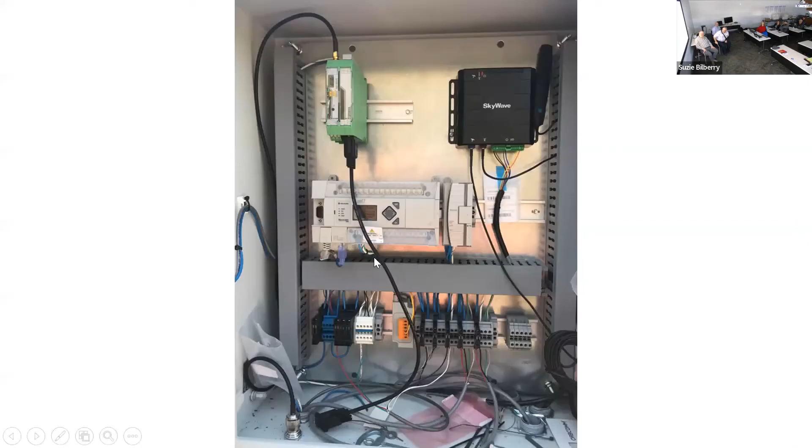That's just a picture basically of the inside of one of the boxes, kind of showing some of the little bit of the technology that's in there.

What's really nice on this whole thing is that we can monitor what's going on at any time. We have the capability of controlling remotely the LaRue Creek, and what we can do with the water we need at the end of the pipeline, our LaRue Creek.

We can't remotely control the water coming out of the canal. We're in the process on our big picture, we're in the process now of looking at putting a reservoir, a regulating reservoir above the pipeline, to where we can have that bounce in there. Then we can be able to control what water's actually going into the pipeline there, or the canal, and be able to save water that right now, if the canal comes up or somebody shuts off.

Or LaRue Creek, for some reason, we wind up with extra water, it spills, it goes into LaRue Creek and we lose it, or vice versa, we lose water in the pipeline and now we're struggling to bring water on down, 30 some miles upstream to bring it down. It usually takes a day or better.

If we get the reservoir in, we'll tie that all into SCADA, where things will automatically keep that canal at the same level, and the reservoir will take the bounce to where it gives us time to go up and actually conserve water in our main storage at Paonia Reservoir.

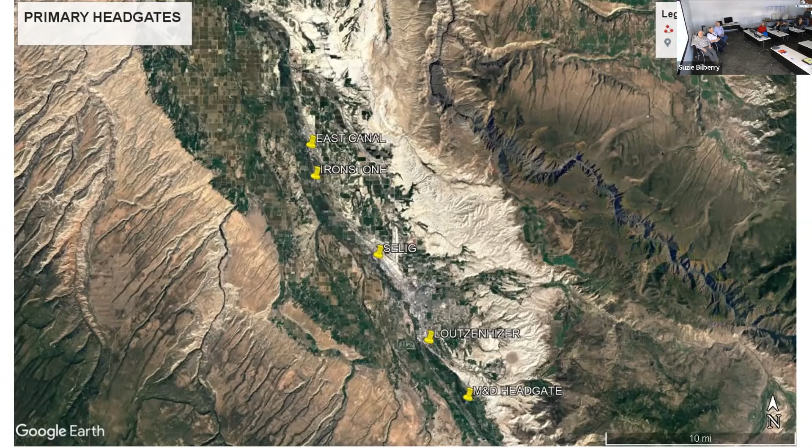These are just some of the major canals. This is the East Canal right there. Just some of the canals where we've installed some of our SCADA telemetry.

As Craig mentioned, we coordinate through the state engineer's office for our data, using their satellite platform to push it up. That helps their water commissioners make informed decisions for their administration of priority rights. So we work quite closely with them at some of the tail ends of our canals. It also helps us in all of our planning of projects, on how to better utilize the existing water in the canal systems.

One of the problems we have right now, and I'm sure it's universal across the room, is when you have bounce at a head gate, as you move down the canal system, that bounce just gets worse and worse. So if we can implement telemetry through that, we can better track how water moves, and minimize that bounce at the head gate by utilizing SCADA.

And it's just the timing, these are big gates. Historically, you needed personnel to run out there and adjust it. Some of them are in town, but it's nice to be able to have from the office a comprehensive picture, 35 miles of river, knowing what flows are where within our system and being able to adjust them simultaneously or plan. Again, being able to set up warnings and triggers that let us know which direction the stream is going is crucial in our operation.

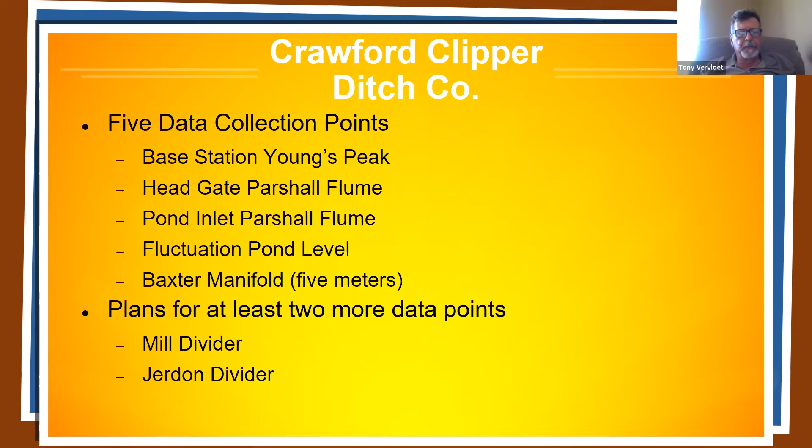Anyway, I'll throw my video up, my map here if that's easier for you. All right, what I'm going to do is pull up my note slide, which just disappeared on me. There it is. I can follow along. So my name's Tony Vervloet, I'm a board member of the Clipper Ditch Company.

We're all volunteers and we work diligently to keep our ditch in running order. I would like to start by thanking Raquel and her team for putting on the workshop. I think it's a big help. I hope it is anyway.

So we've got 5 data collection points, and we can alternate between the slide and the map. What we have is our base station on Young's Peak, a high point nearby, which allows us to push our data to the Young's Peak base station from our head gate, which is off of a Parshall flume, and our pond inlet off of a Parshall flume. These are sonic sensors on the Parshall flume, our fluctuation pond level, and then the Baxter manifold, which has our manifold with 5 meters for the Spurlin Mesa group. We have tied into those 5 meters and pulled data off of that.

Our system is relatively new, we've only had it in play for about 8 or 9 months. So we're still learning, working on the do's and don'ts and what works best for us, but it has been a very good system so far. We do have plans to add 2 more data collection points, the mill divider using a combination of ultrasonic sensors, Bigfoot sensors, and we're looking at actuated gates for this.

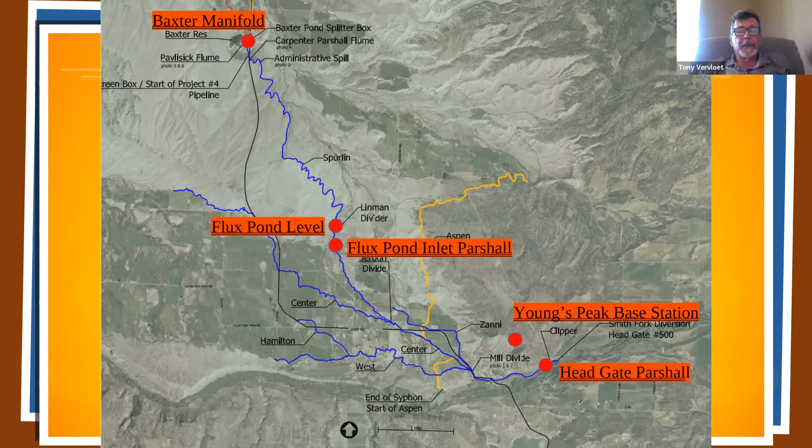And we're also setting up one at our Jerdon Divide, which we're hoping will work so we'll be able to actuate that also. So we'll reach our supervisory control at that point. If you'll go to the next slide, let me pull this up and make sure we're on the right page. Yes, that's perfect, this should be the one on equipment.

We have 3 CR300 data loggers, data acquisition points, or PLCs. We have 1 CR310 and another CR1000. That's the one that's pulling data from the 5 meters.

Our data collection points are pushing data to our base station using 900 megahertz radios. Then at that point it's got a cellular gateway, so we're jumping to cellular, and then we broadcast our data via cellular so that we can pull it up on phones and don't have to find a landline or someplace to gather data. We can work off of cellular.

The Parshall flumes have ultrasonic level distance sensors, so that's working off of Parshall. Our flux pond uses a pressure transducer for depth.

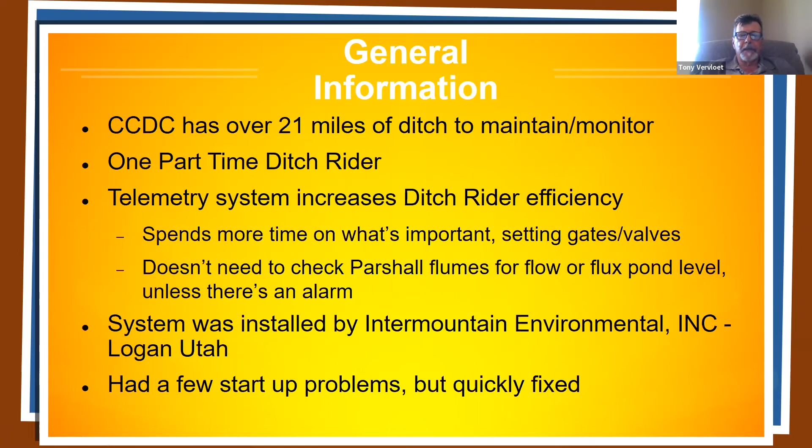And now, Gary, could you turn the light on, please, for us? They're on a timer, so they do their thing. Oh, there. Thanks. Let me minimize this too.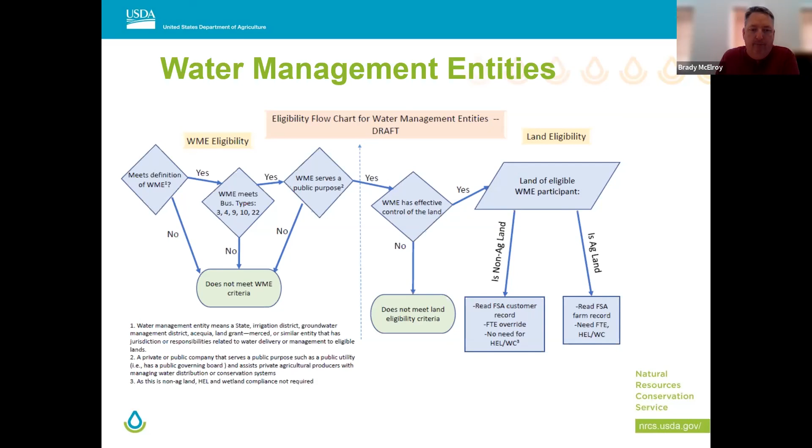These two things have been mentioned before. The RCPP program is probably more of a district or group kind of project rather than individuals, where you can use that to leverage some of our money with some of your resources. That may be for your grant writers, to where you apply through grants.gov for that.

One that may be of interest, and this was mentioned also, is the WaterSMART funds. It's a BOR program, but at our national level, NRCS leverages BOR funds, so we can combine some EQIP funding with BOR to work on some of these kinds of projects. There's about a one year lead time - our state office has to apply to Washington DC for those monies. So if you're interested, please talk to your local field office, and they'll get in touch with our program staff and work through that process.

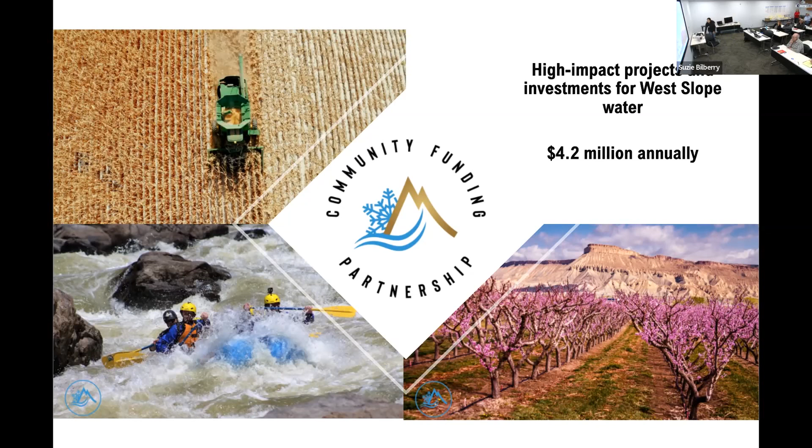So anyone within the counties can apply. You can be government, you can be a ditch company, you can be an individual person. We do want to see a project that has partnerships. That's one of the things we look at.

So a collaborative project, and we're trying to leverage funds. Don't expect to come to the River District and try to fund a project 100% with River District money. That's not the intent. The intent is to use our funds to match other needs. We also expect the project proponent to bring some funds to the table.

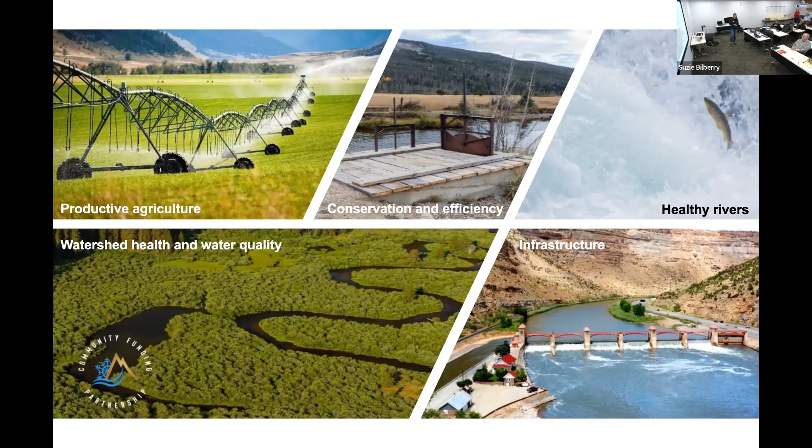These are the 5 buckets that your project can fit in. The more buckets it fits into, the higher chance of you getting our funds. So we have productive agriculture, conservation and efficiency, healthy rivers, watershed health and water quality, and infrastructure.

So this last year, which was the first year of the program, $4 million. Actually some of this was approved in our January meeting. I think in 2021 we were close to like 3.2 million. But as of now, we've distributed $4 million to 28 projects, leveraging over $40 million for West Slope water. And here are some images of some of the projects that we have helped. I think, Bob, you're right here.

Quick question: the 40 million that you leveraged, is that in-kind contribution? So not necessarily in-kind. Other funding? Yeah, other funding, so state, federal.

Briefly, we do try to encourage people to have a pre-application meeting for us to understand your needs better. We have 2 paths for an application. So if you're requesting less than $50,000, that can be reviewed and approved by our general manager. We don't have a deadline for applications, it's on a rolling basis, so if you're going that path you can apply at any time. It probably takes a month-ish for it to get approved or not.

If you're requesting more than $50,000, that has to be approved by our board. And our board only meets 4 times a year: January, April, July, October. We need that application approximately 6 weeks before the meeting so that we can work with you and evaluate it before we bring it to our board.